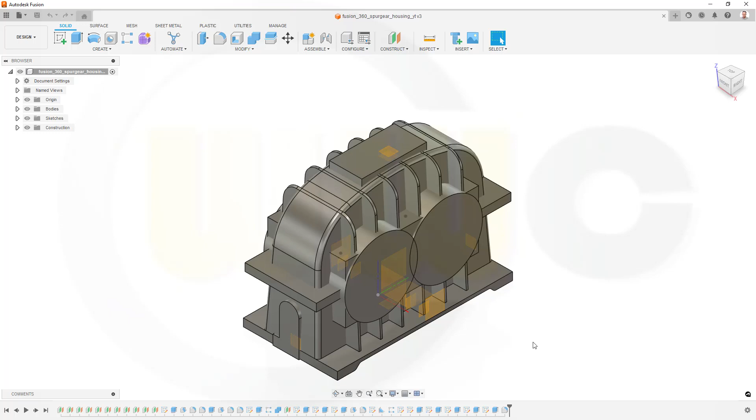Hi, welcome to the fourth part of the Spur gear housing in Fusion 360. At first I want to fix that small problem here.

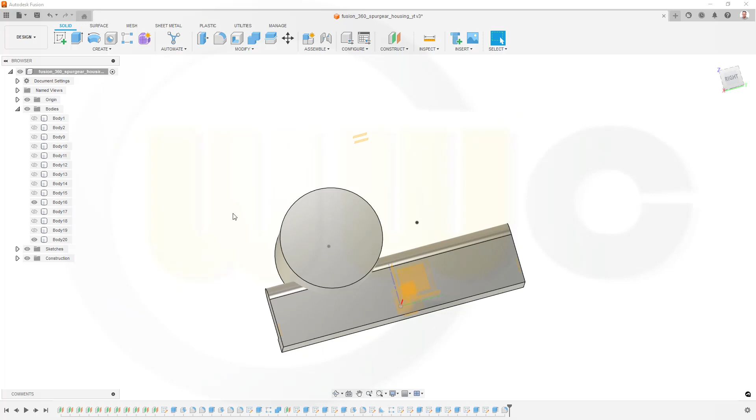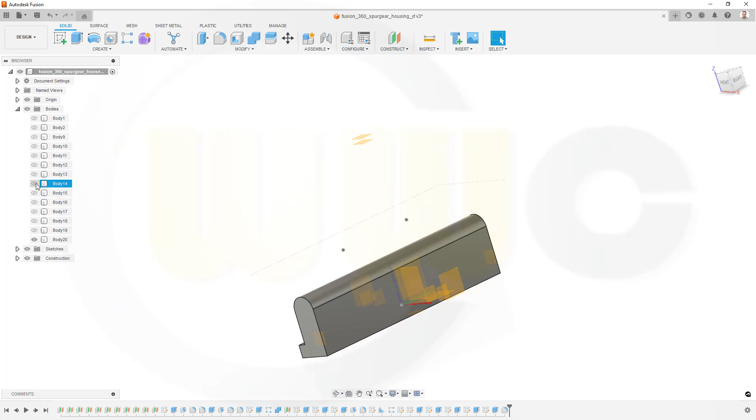So maybe hide the bodies I don't need. Not this one, and I might need... where is it? I did it at first. So this should it be?

Yes, okay. First let's add some fillets, one here with 5mm and another one here with 2mm.

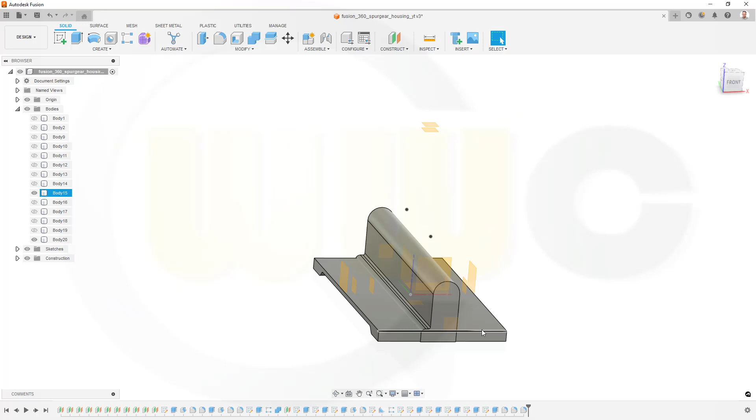Okay, now this has to happen before that solid here, so that should be here. That's this one, extrude 6, the sketch. And yes, so it should happen before I've subtracted that extrude. So it should happen here, and that would be extrude 5.

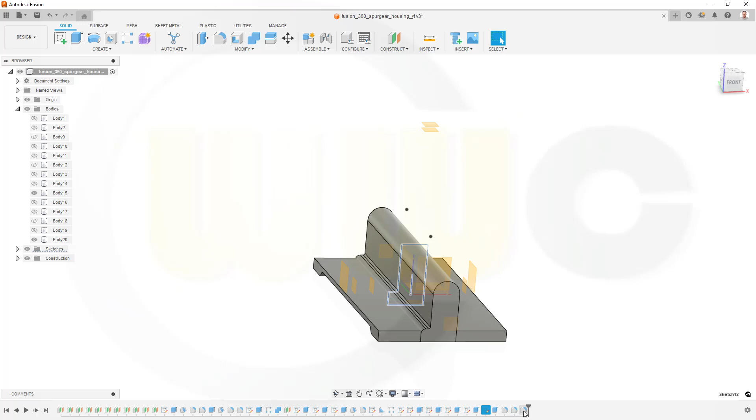So let's select them and move them before extrude, or after extrude 5, here. And let's bring back that one here. Yes, this looks good.

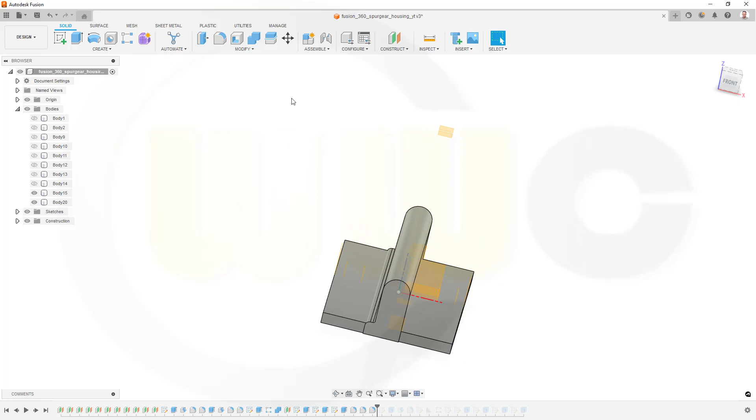So let's make a union. The target should be this one, the tool should be that one. Confirm. And if I move that slider back, it should be fixed.

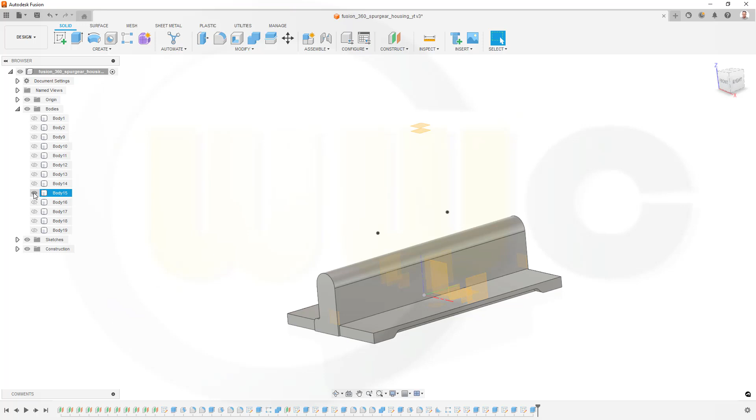Great, now I can go for the handle at the top. So maybe hide this one, bring back that one. I will need a sketch on the right plane in this case.

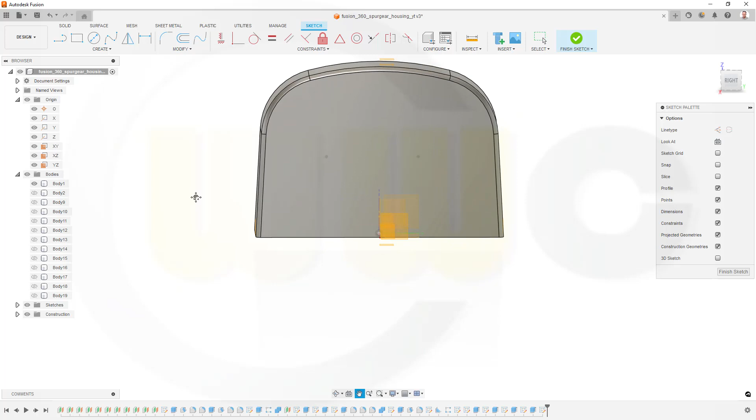And that would be the YZ plane. Okay, go for a sketch on the YZ plane. I want to bring in those contours here. So let's see what we have here.

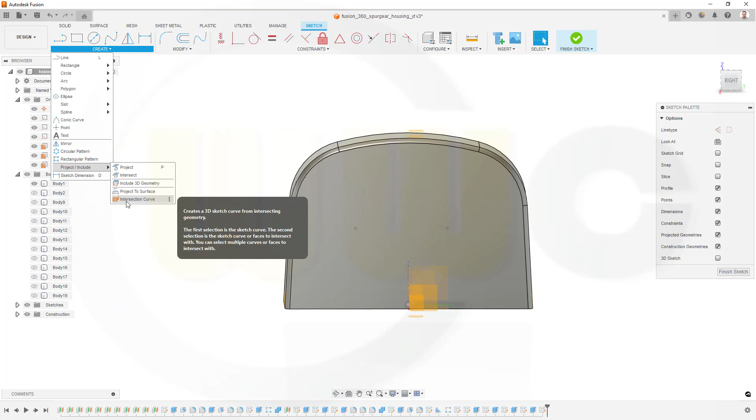Project include, I could try to go for intersect, or intersection curve, depends if it's working here. Let's try intersection curve. No, I don't have a curve. So let's go for, again, intersect, see if we can intersect.

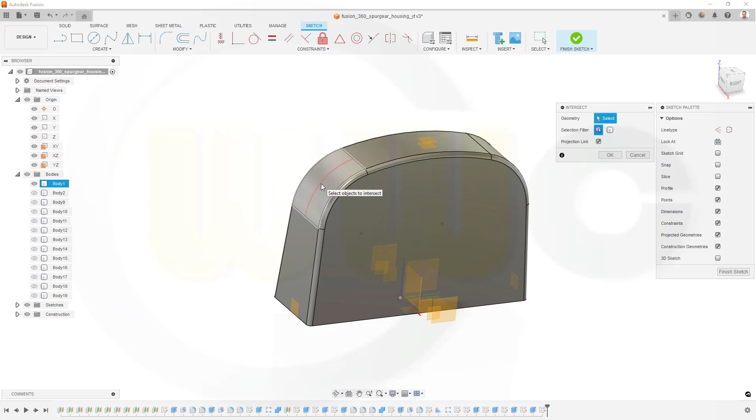Looks good, and it would be great if it would be for construction. Okay, this should be brought in, that should be brought in, and this should be brought in, and confirm.

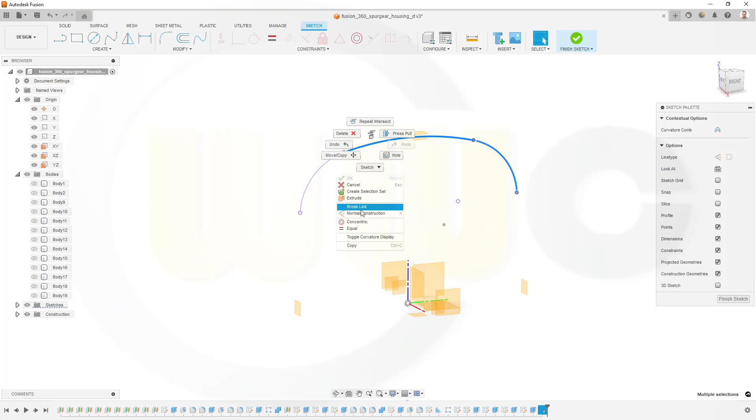Nice, I could hide that body for the moment. Select those elements here and make them for construction. And this should be for construction as well.

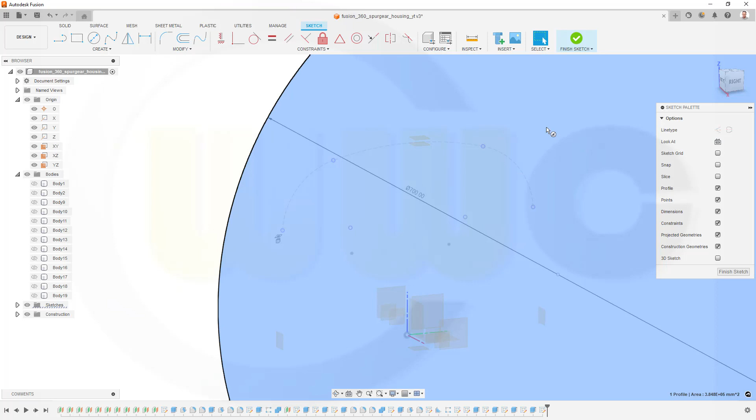Great, I need 2 circles. One with 700 diameter, and another one concentric to the first one with 690mm diameter.

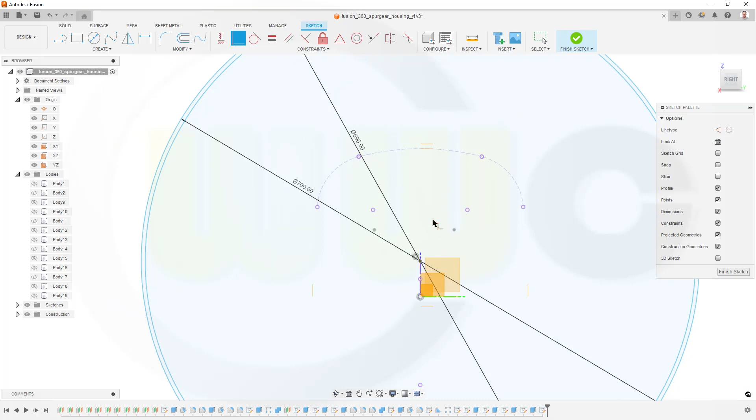And that point should be, of course, on that plane or axis. So go for coincident and put this point here, right there. Great. And move it down a little bit, because that circle should be tangent to that plane up here, this one.

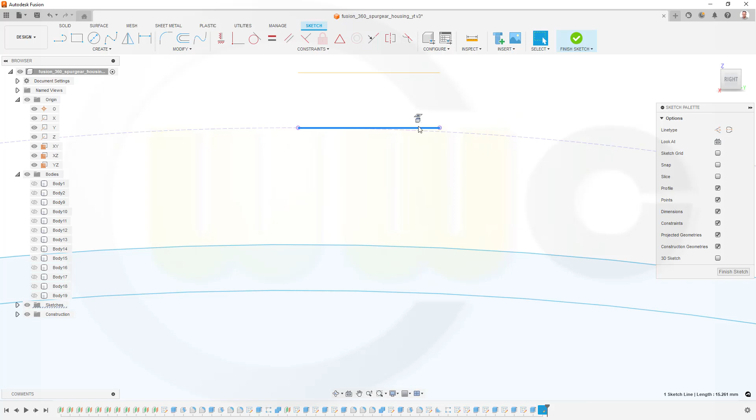So go for tangency, this one, and that plane, but first I have to bring in that plane. So let's go for project include. Let's project this one, confirm, make this for construction only. Okay, and now go for tangency. This should be tangent to that projected plane.

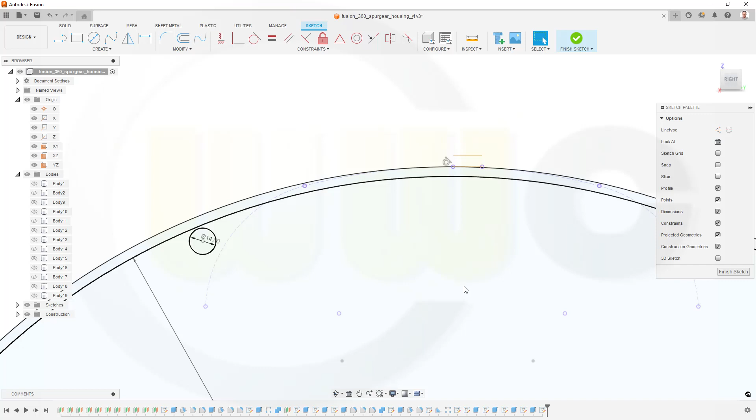Great, now I will need two circles, one over here, diameter 14, and one over there, again diameter 14. Yes, this should be for construction only,

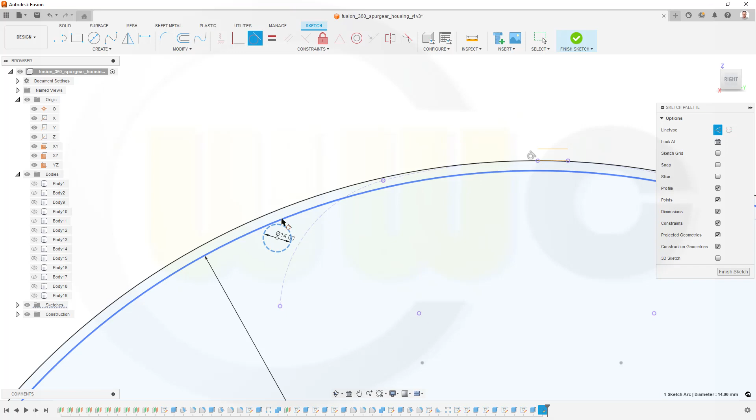and it should be tangent here and there. Great, let's go here, make this for construction only, and again tangency here and tangency there.

Nice, now I could trim. Where's the trim command? It's not up there, that's crazy. Okay, so this could be trimmed. Yep, and I will need a line from the center up there.

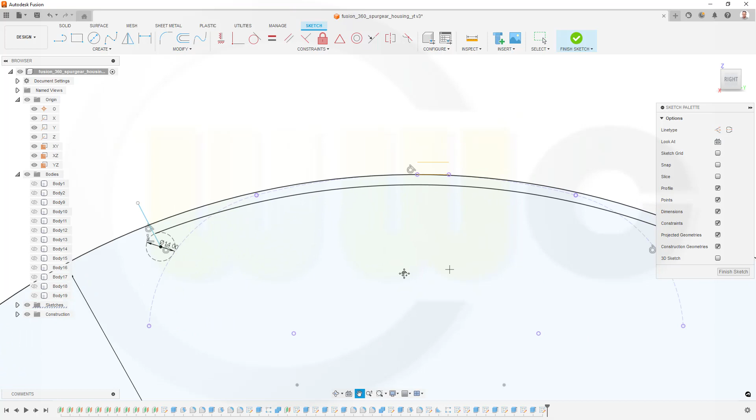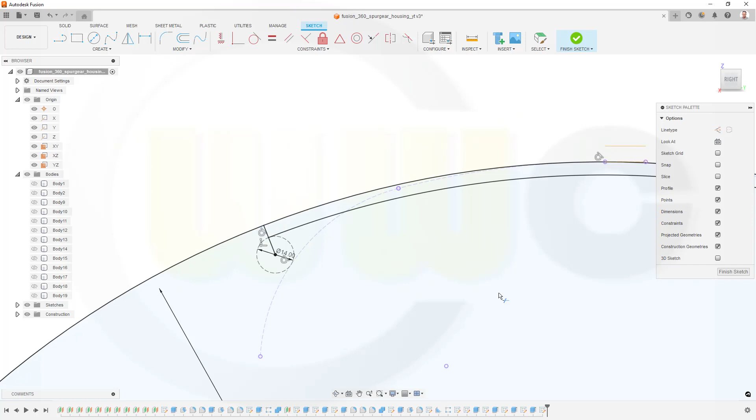And another line like this. Okay, now this endpoint should be right on that line, on the other side as well. Endpoint line. Then go for trim. Well, this can be trimmed and that can be trimmed.

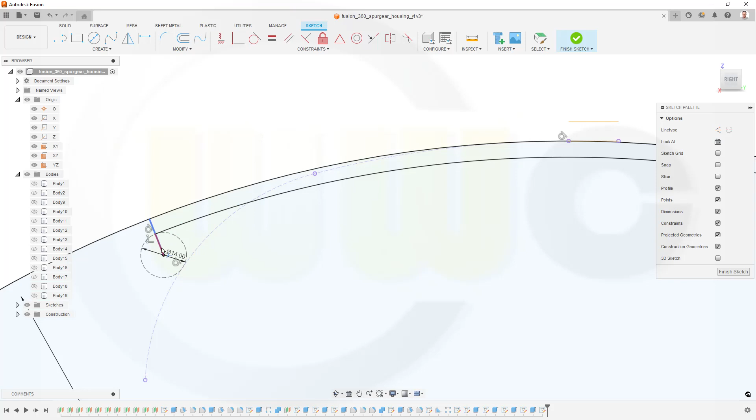And this should be trimmed as well, but maybe I've lost the constraint, I'm not quite sure. So that point should be on that line. Yeah, then go for a trim over here. Trim, trim, and maybe again go for this point should be right there.

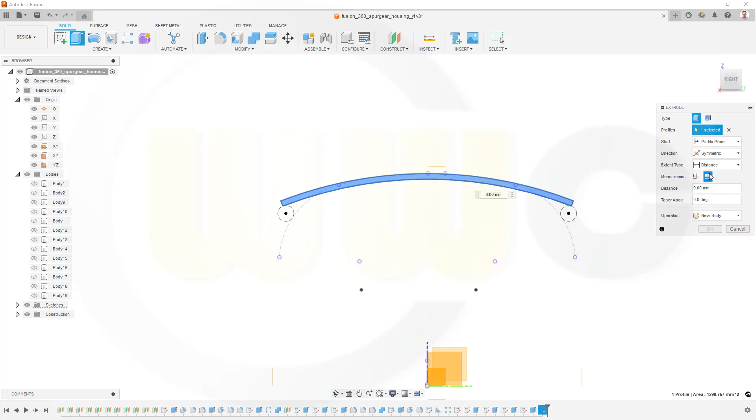Okay, finish that sketch, let's make an extrude with 10 millimeter altogether. So let's go for an extrude. Yes, it should be symmetric. Yes, whole length should be 10 millimeter.

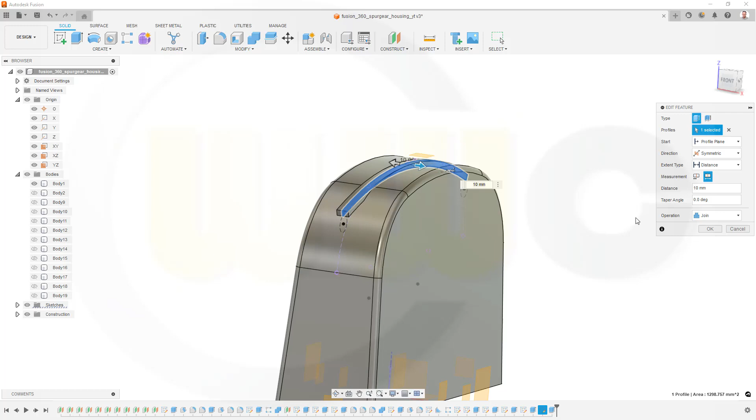Yeah, and of course that should be united with that one here. So let's go to that and make it join with this body, with body 1. And okay.

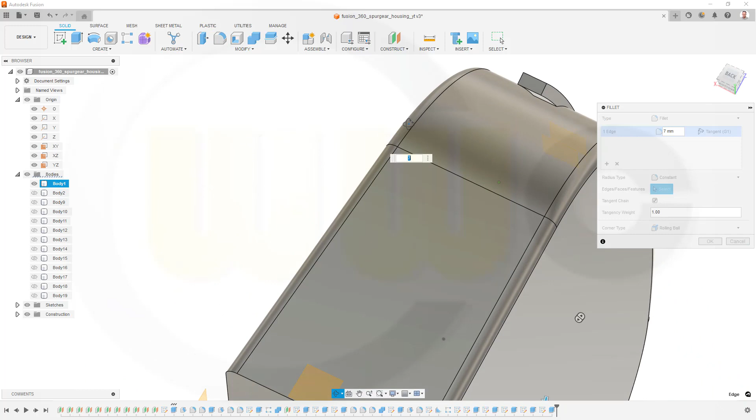Now I need 2 fillets with 7 millimeter, that's one edge here, 7, and on the other side as well. Hard to select somehow, nope. So let's go for plus and okay, again 7 millimeter.

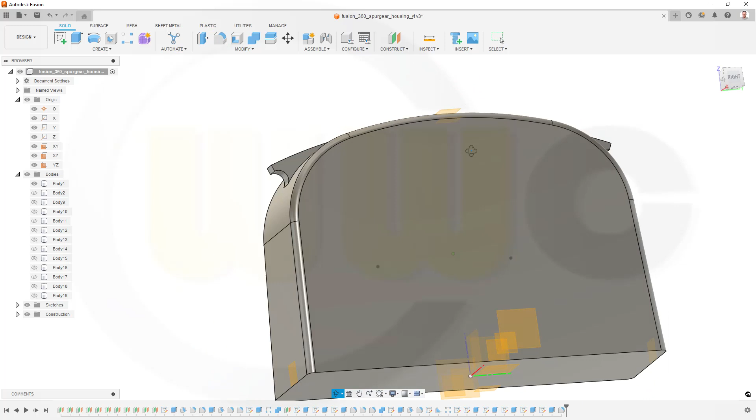Now I will need this edge as curve, so let's go for a sketch. And I need a 3D sketch. So which plane? Let's go for this plane, that plane here, yeah.

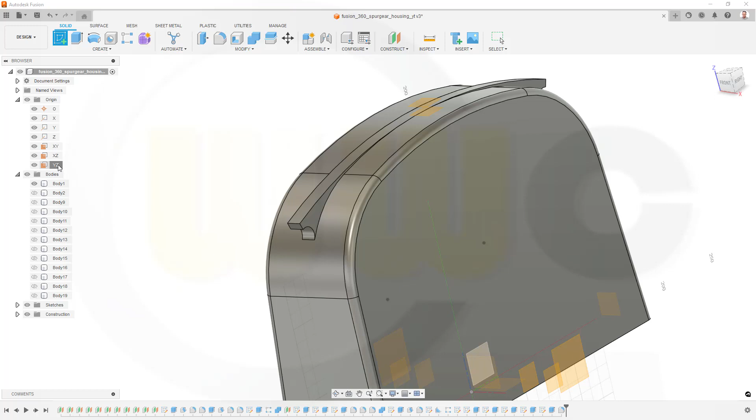And I want to use a 3D sketch, so let's go for 3D sketch, and I want to use those edges. So go for create, and I need project include. What do we have? Include the geometry, yeah, let's see if it works.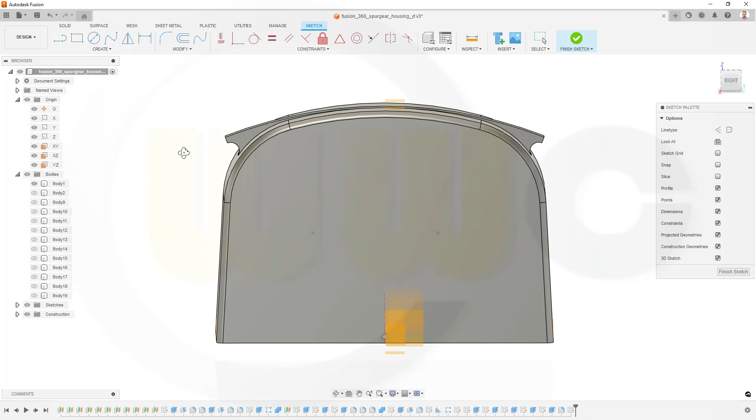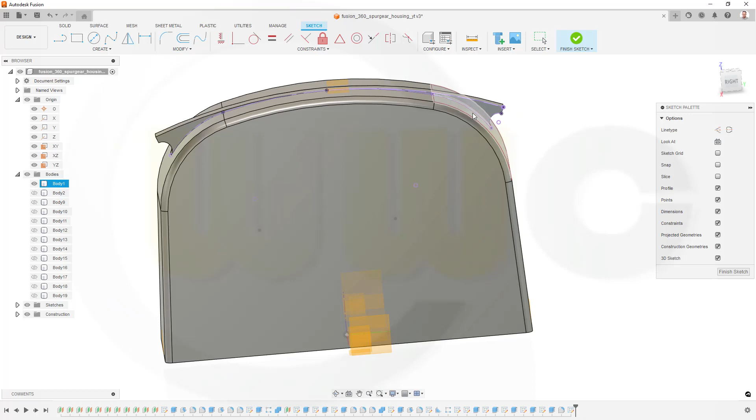So 1, 2, 3, and 4. So I'm not sure, did I get, seems I've selected that surface. I don't want that surface, so let's deselect it and go for that edge here. This looks okay.

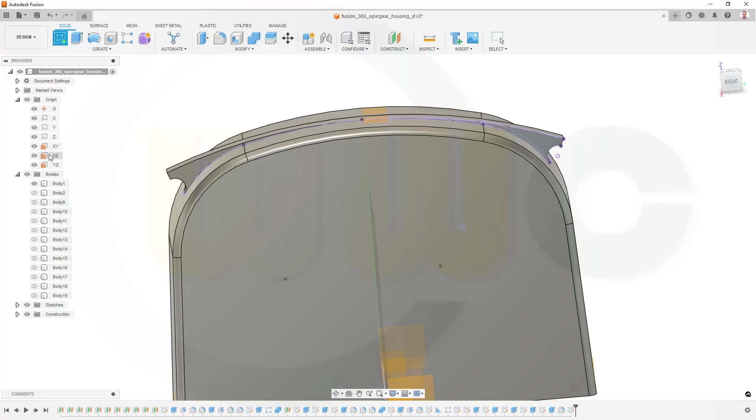Finish that sketch. Let's see if we can use that curve for a sweep. And I want to have a sketch on this plane here, not a 3D sketch.

And I need that point here, so bring in that point by, let's go for project this point here. Okay, and I need sort of a triangle here, and I need an angle.

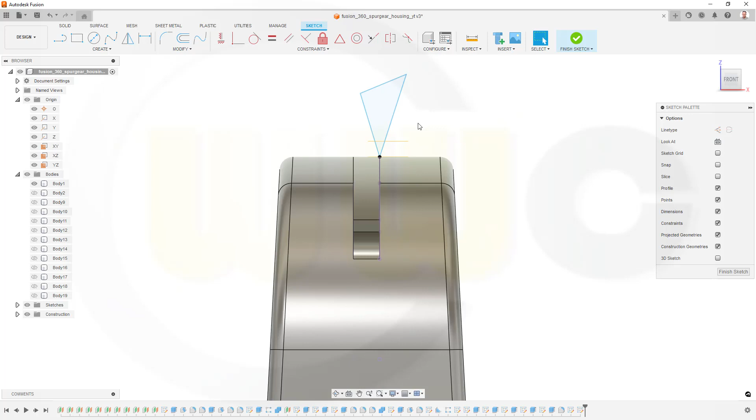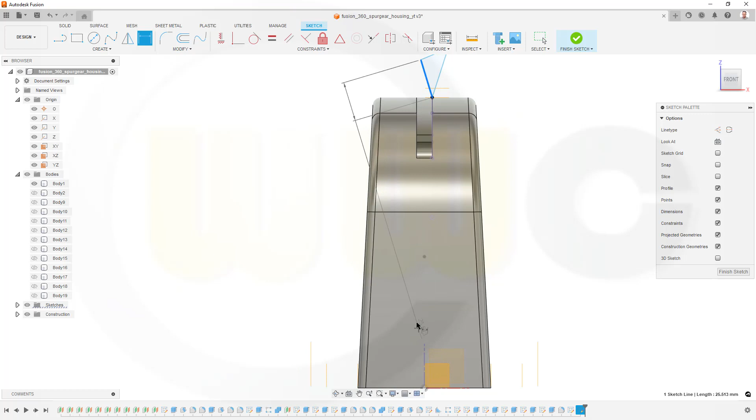So where is... there you go. This angle here should be, can I select it? Not really, because the body is here, so nope. No, can't select it.

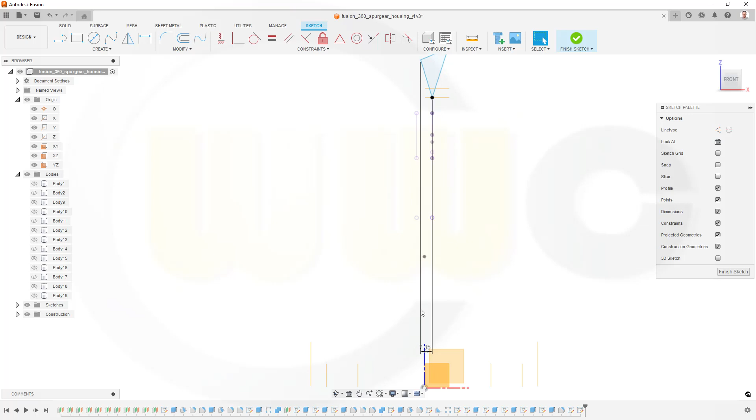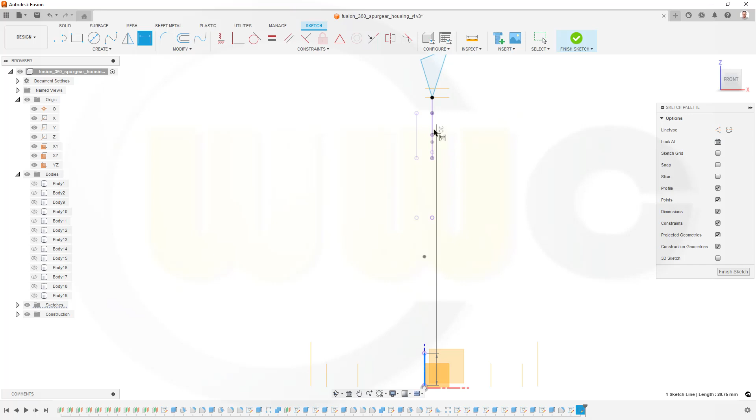Let's delete it and bring in that one here. So go for create, project/include, project this one here, and go for an angle between this one here and that one, and this should be 10 degrees.

Now this could be moved up. Finish that sketch, bring back that body here. Let's see if we can do the sweep.

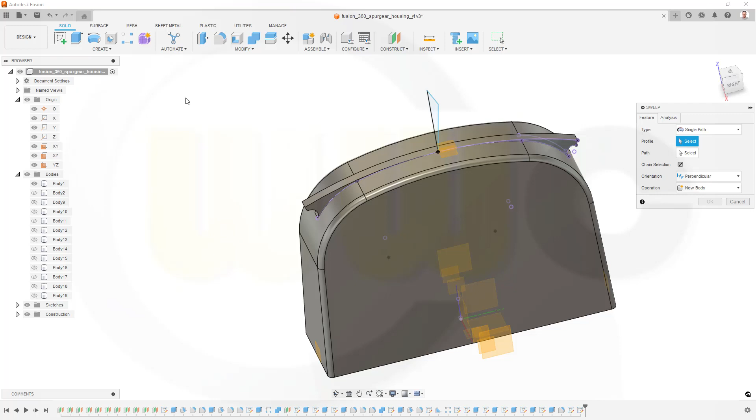Create, sweep. And the profile would be this one here, yes. And the path, chain selection, should be that one here. Looks good, and I want to cut. That's okay as well, so let's confirm.

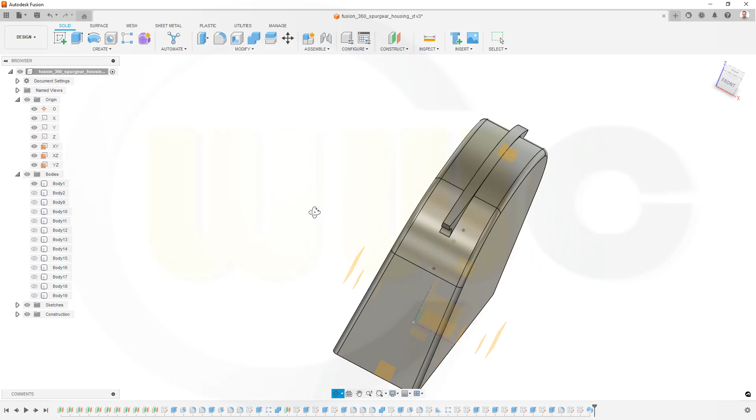Yes, and now I want to mirror that feature. If I can't mirror the feature, I will mirror the body. I will make this a new body. So let's go for mirror.

Where's the mirror command? Not here, really, so it should be here. Pattern mirror. I don't want to mirror a body, I want to mirror a feature, and the feature would be, of course, this feature here. And the mirror plane would be that plane here, and that's the YZ plane. And confirm.

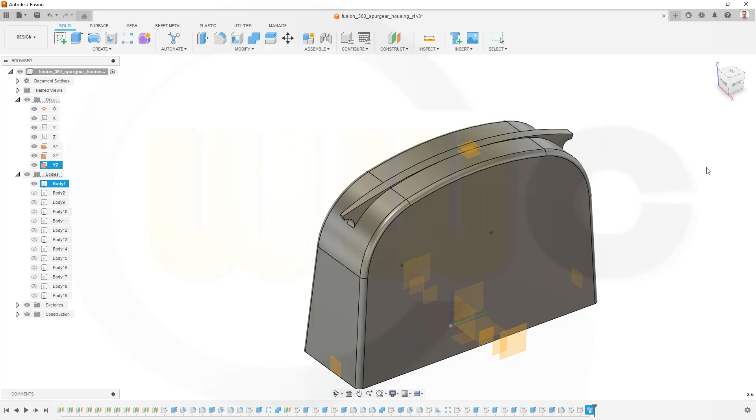Yeah, looks pretty good, and I'm done for today.